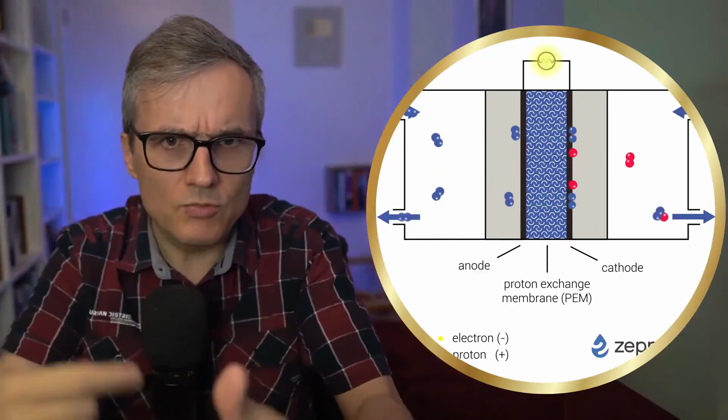The second step is the fuel cell, which is found in the car and converts the chemical energy of hydrogen back into electric energy in order to rotate the shaft of the electric motor. Two intermediate steps that cost money and in which additional energy is lost.

Look, let's say we have industrial electrolyzers, which convert the electric energy from wind turbines and photovoltaic solar panels into the chemical energy of green hydrogen, separated from water. Then, we compress the hydrogen and store it in tanks and transport it to fueling stations for cars, or we transport it there through a dedicated hydrogen pipeline network, an infrastructure that still doesn't exist. At the fueling stations, the hydrogen is loaded into the car's tank.

The energy density per kilogram of hydrogen is much higher than that of electric batteries. 33,000 Wh/kg of hydrogen compared to only a few hundred Wh/kg for lithium-ion batteries. The same thing happens with energy density per volume. With higher energy density, hydrogen has an advantage. We fill the tank with more energy and it goes farther than the electric car. Plus, we can refuel with hydrogen faster than we can charge an electric battery.

But if we remember the explosion of the airship Hindenburg, which had hydrogen in its balloon, maybe we're scared to carry compressed hydrogen tanks in the car. However, it seems that they are very safe as long as the regulations are followed. Researcher Michael Swain from the University of Miami says that they are actually even safer than the gasoline in a regular car, which is also flammable.

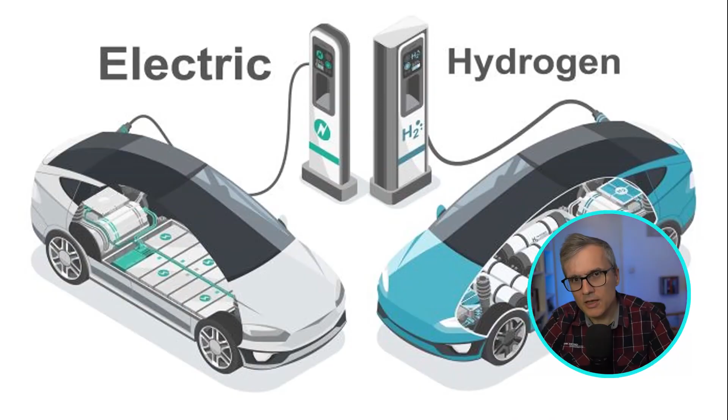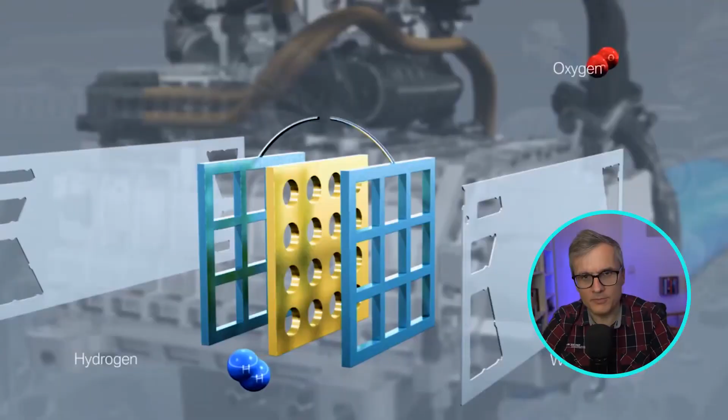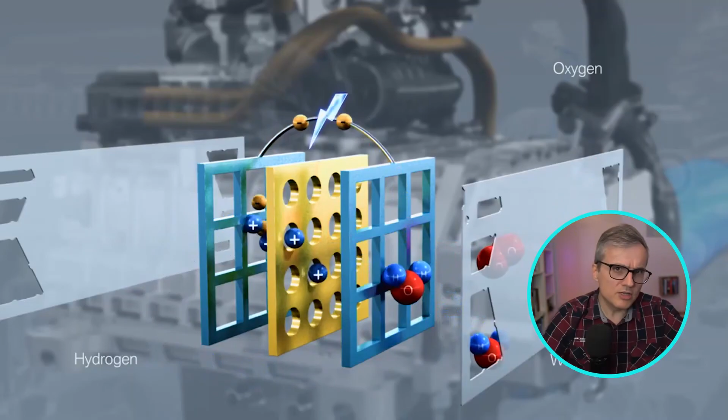In the hydrogen car engine, we need something else: fuel cells. These operate in the opposite way to electrolysis. The hydrogen from the tank is combined with oxygen from the air to form water. There's also water vapor coming out of the exhaust pipe, which is ideal for a clean environment. During the process, the chemical energy stored in the hydrogen is released, which was stored when it was extracted from water. The cycle is complete.

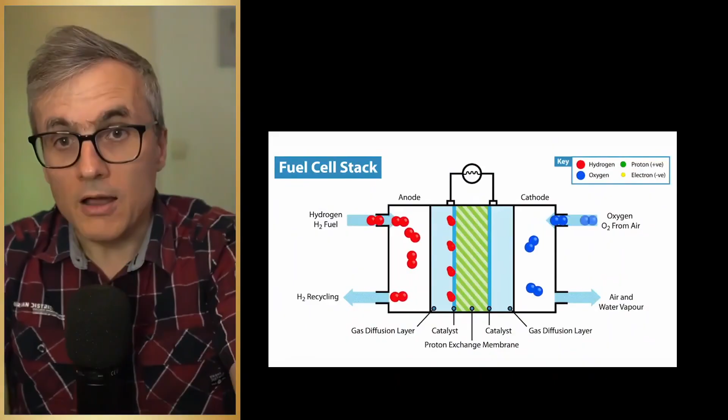When we extracted hydrogen from water through electrolysis, we used electrical energy from the outlet, let's say produced by wind turbines, to store it in hydrogen. Now we have recombined the hydrogen with oxygen, recovering the initial water and releasing the chemical energy of the hydrogen, which we converted into mechanical energy through fuel cells and the electric motor.

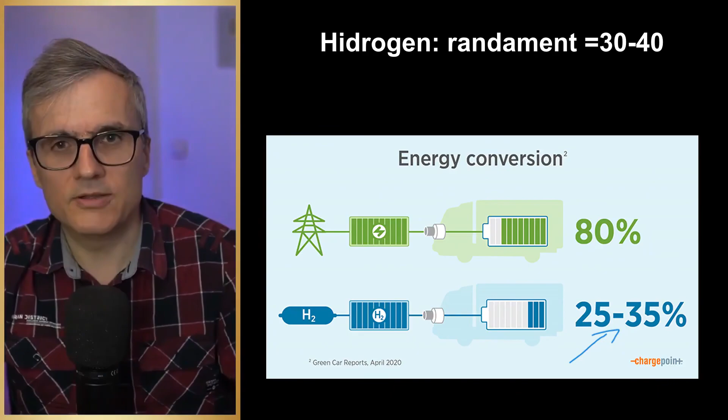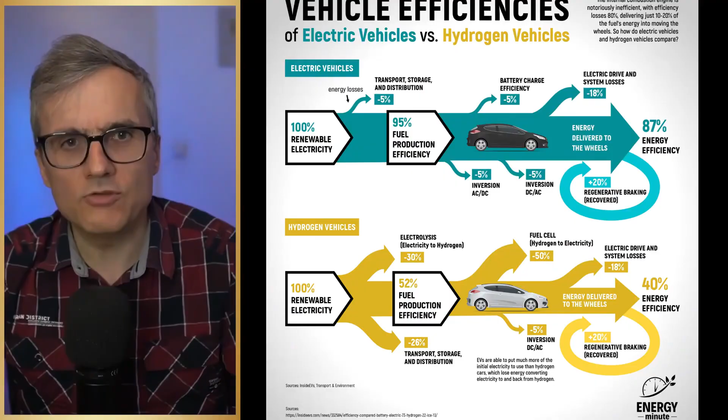The overall efficiency of the process is less than 40%, some even say 30%. Yes, you heard that right. That's compared to an electric car, which has an efficiency that even exceeds 80%. Extremely little when it comes to hydrogen. This is also reflected in the cost. Estimates show that the energy cost per kilometer for hydrogen cars is about 3 to 4 times higher than for battery electric cars, although I have found estimates that say it is more than 10 times higher.

That's why there are many voices saying that it doesn't make sense to bother with hydrogen to power cars. We lose too much energy along the way, almost 60 to 70%. And only 30 to 40% remains. The cost will automatically be higher than for an electric car.

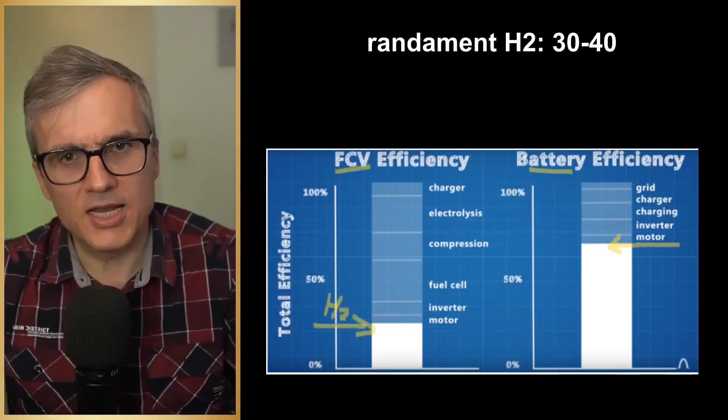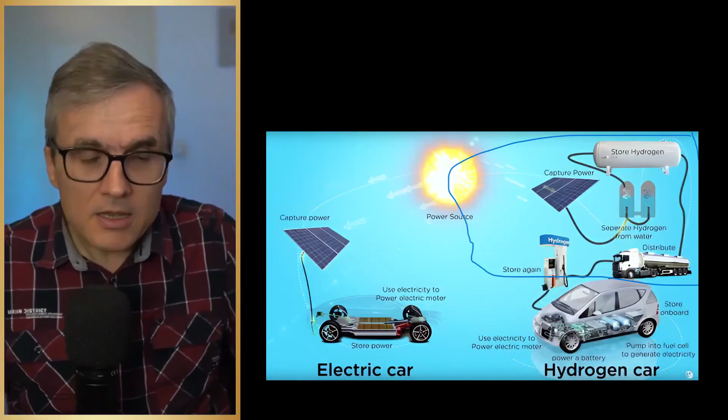Why is so much energy lost with hydrogen compared to the electric car? It's normal. With the electric car, the energy is stored directly in the battery without conversion like with hydrogen, where electrolysis is used. And it's used directly from the battery without another conversion like in the fuel cell. This approach removes the entire energy-losing chain seen with hydrogen from the beginning. This is the main reason why, in practice, we still don't have hydrogen cars.

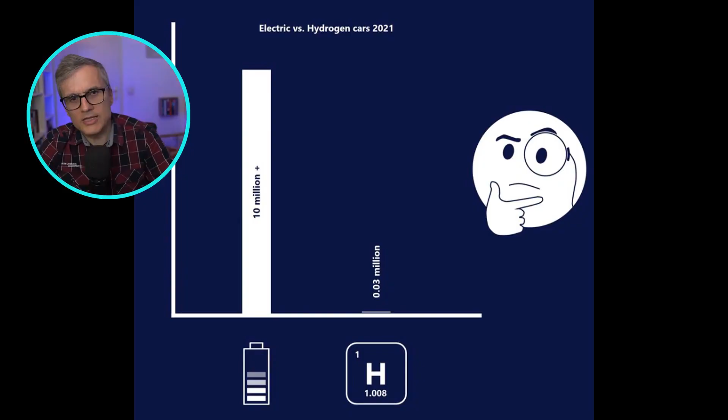Only a few models of such cars are produced in the world, like Toyota Mirai or Hyundai Nexo. And in Germany, the strongest European economy, only 263 new hydrogen cars were registered in 2023, down by 70 compared to the previous year.

Simply put, hydrogen technology is more complex. With additional elements like electrolyzers and fuel cells, the efficiency is still low and the hydrogen distribution system is almost completely lacking. Let's be honest, it seems like a dead end for cars.

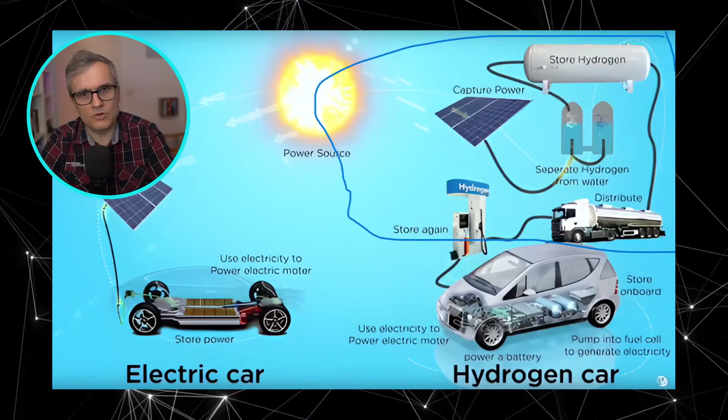The energy efficiency of hydrogen cars is much lower than that of electric cars. The efficiency is somewhere between 30 and 40%. So, is hydrogen completely useless for transportation? Not necessarily. Electric transportation has a problem today, the weight and volume of batteries.

We see this from the very small number of electric cars that can go over 400 kilometers without being recharged. Of course, you can go 800 kilometers on batteries if you carry twice as many batteries with you, but that means double the battery cost as well as double the weight and volume. For trucks, the numbers will be even higher.

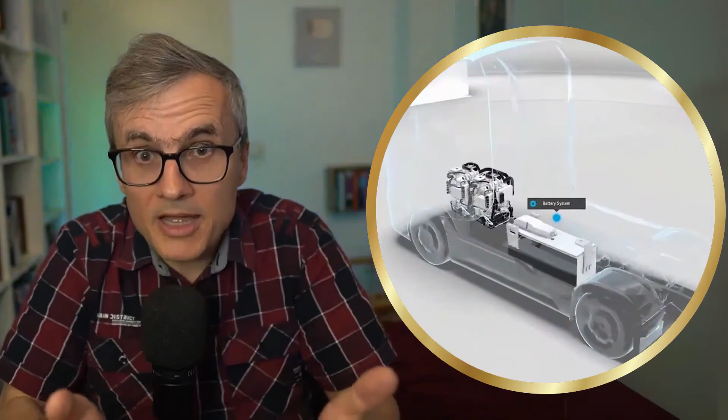If we talk only about trucks, there are some immediate advantages to hydrogen. The energy density of hydrogen is higher, both in terms of volume and mass. This means that a hydrogen truck will have a greater range than a battery-powered one with the same volume or mass. In addition, hydrogen can be refueled much faster than a battery can be charged, and that's important for trucks.

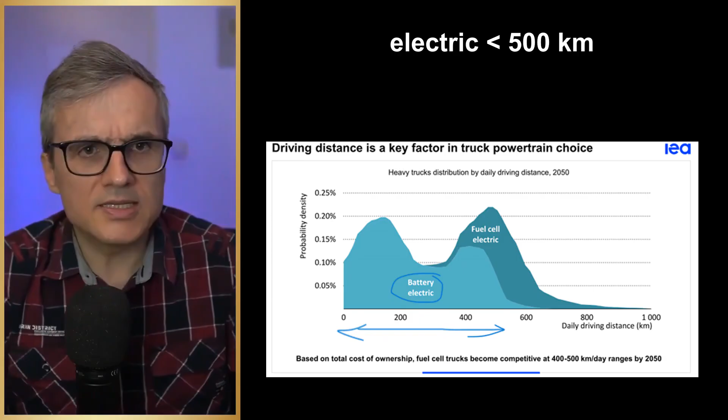That's what we see in this chart. It's a prediction of the types of trucks that could exist in the year 2050. As you can see, most of them would be electric when the distance is less than 500 kilometers. For longer distances, however, the trucks could run on hydrogen. Hydrogen is still less efficient than electric batteries. That's because someone somewhere will be willing to pay more to transport faster with hydrogen and over longer distances.

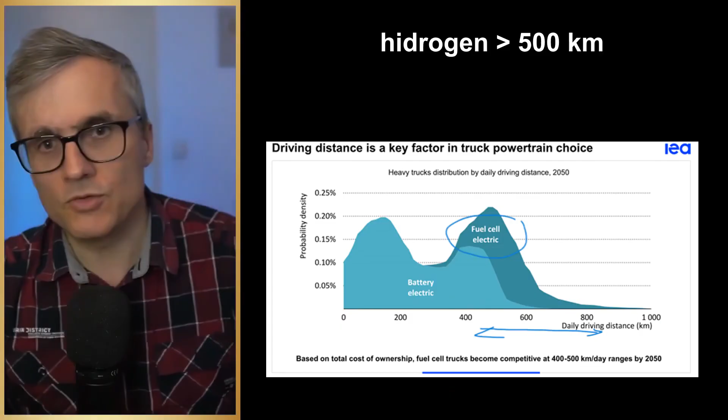It's possible this scenario won't occur by 2050. That's because electric batteries are developing rapidly now, and it's possible that in over 25 years the energy density in electric batteries will increase, thus cancelling out hydrogen's advantage. It's true, there have been a few hydrogen truck projects. However, none of them are economically feasible yet.

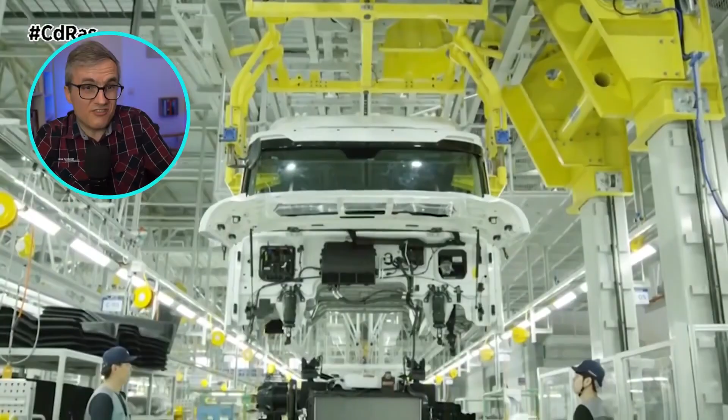Another type of project is the Hyundai Xcient Fuel Cell, a hydrogen truck launched by Hyundai. Although it promises extended range and zero emissions, the high production costs and limited infrastructure for hydrogen refueling make it difficult to adopt this type of vehicle on a large scale, at least for now.

Along the same lines, there is talk about hydrogen ships such as Energy Observer 2, which is expected to be put into use in 2025. Or about hydrogen-powered airplanes, with the first one expected to be built by Airbus in 2035. But are these processes economically feasible?

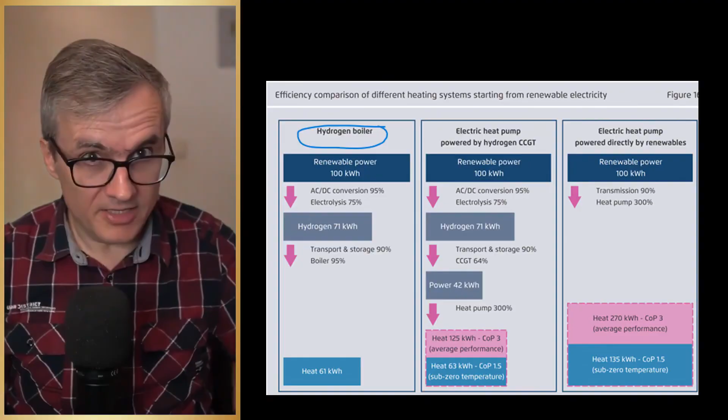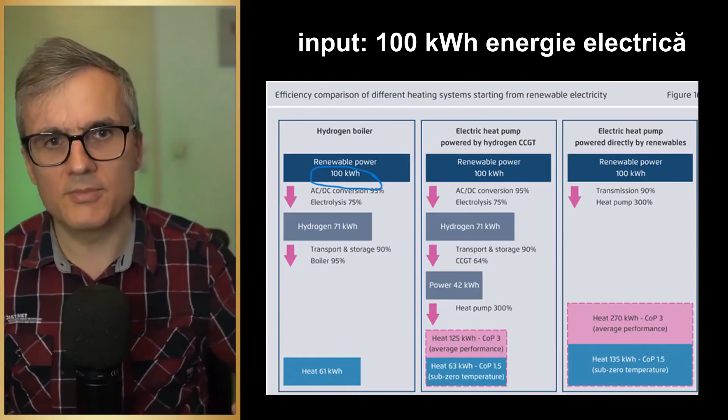The situation becomes even clearer if we compare green hydrogen heating with heating using heat pumps. Take a look at this study. On the left, there are 100 kWh of electricity obtained from renewable sources. We pass the energy through electrolysis, extract hydrogen, transport it through pipelines, and put it into a boiler, and then we're left with only 61 kWh of useful energy.

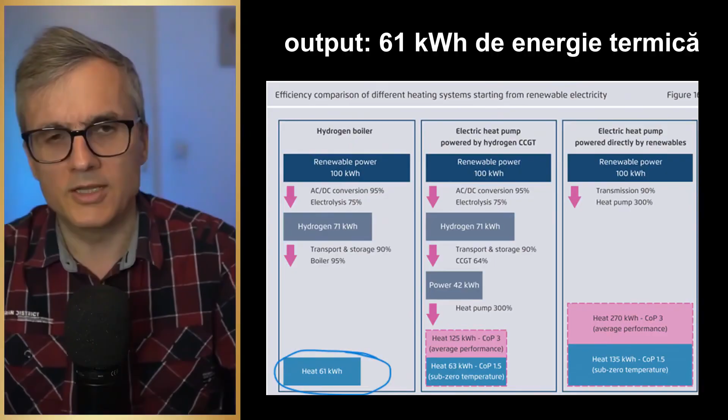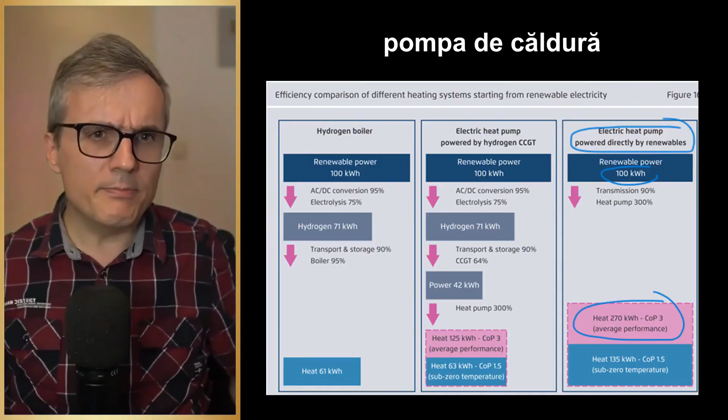On the right, we see how much we get from the heat pump if we put the same initial 100 kWh into it. 270 kWh, which is almost 4.5 times more than from hydrogen. If you're surprised that more energy is obtained, please watch my video about heat pumps. The heat pump is clearly much more advantageous.

For all hydrogen systems, transportation is a problem. For short distances, transporting hydrogen through natural gas pipelines would be the preferred option, but it's not that easy. Here's what the EPG report says. For distances less than 1,500 km, transporting hydrogen through natural gas pipelines is generally the least expensive option, although this requires either reusing existing infrastructure or new investments to connect production sources to demand points.

For longer distances, transporting hydrogen as ammonia or as a liquid hydrogen carrier could be a relatively cheaper option, but conversions come with significant efficiency losses.

If you didn't know, in Romania we have a draft national hydrogen strategy, which is currently going through the environmental approval stage before adoption. Essentially, it's a requirement from the European Union because part of the funding will also come from there. To give us an idea, the current situation looks like this.

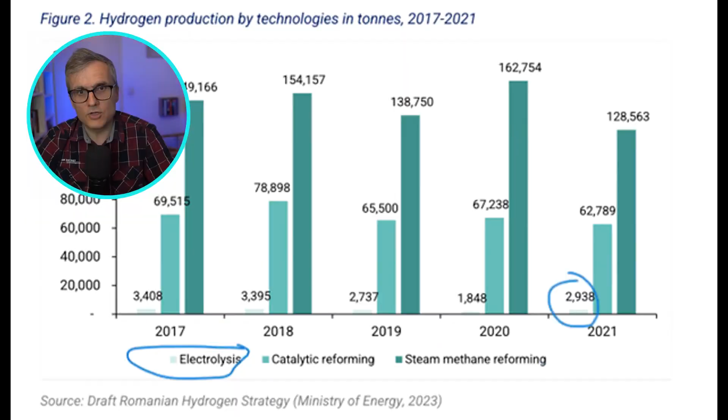At present, the grey hydrogen produced in Romania is over 200,000 tons, and the green hydrogen produced by electrolysis is only 3,000 tons. That means we need an almost 60-fold increase in green hydrogen to replace the industrial grey hydrogen. The draft National Hydrogen Strategy estimates an investment requirement of 4.8 billion euros to produce 150,000 tons of hydrogen per year from renewable sources by 2030.

Of that, 47% would be used in transportation, 37% in existing industrial activity, and 15% in new industrial applications, specifically in steelmaking. Simply put, by the year 2030, about a quarter of the grey hydrogen produced in Romania would be converted into green hydrogen.

If I divide the 4.8 billion euros by 6 years until 2030, I get 800 million euros per year. If I further divide that by the 150,000 tons of green hydrogen produced annually, I get a subsidy of almost 5 euros per kilogram of green hydrogen produced each year. Essentially, I can't help but notice that this is the current market price of green hydrogen.

Although the subsidy is not dedicated exclusively to industrial users of hydrogen, it is mainly intended to increase the production capacity of green hydrogen. Because in order to generate this green hydrogen, Romania needs electrolyzers and additional solar panels, and eventually wind power plants. In principle, the energy could also come from hydropower or nuclear plants. It is estimated that in order to meet the demand for green hydrogen, 4,000 megawatts of dedicated installed capacity from solar and wind energy are needed. These are very large numbers.

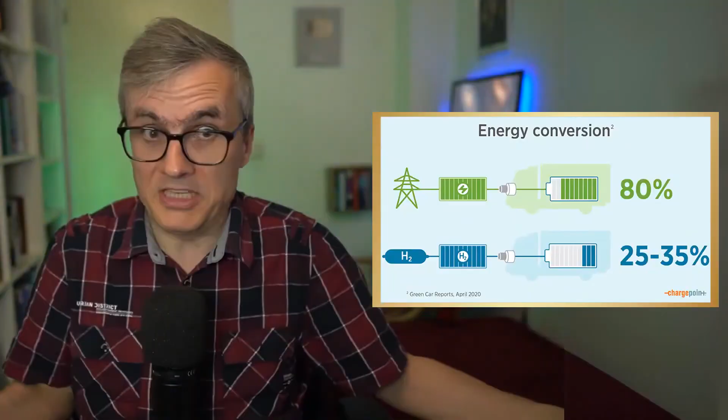I'll be honest with you, when I started my research for this series, I was skeptical about green hydrogen. I knew about the low energy efficiency of hydrogen cars, which is only about 25 to 35% throughout the chain, compared with efficiencies above 80%. And I also knew that hydrogen is not an energy source. It transfers energy from one place to another.

Simply put, hydrogen does not replace fossil fuels. It's still photovoltaic panels, wind power plants, and hydroelectric plants that will do that. Hydrogen only transports energy from one place to another and from one moment in time to another. In other words, I knew that hydrogen is not a miracle solution to the problem of global warming. That was confirmed by what I read.

As I anticipated, using hydrogen in road transport remains economically inefficient. If we replace gasoline and diesel cars, they will most likely become electric cars, not hydrogen-powered ones. On the other hand, I have discovered the importance of hydrogen in industrial processes. Because reforming methane to produce grey hydrogen makes a non-negligible contribution to global warming.

2%. In other words, if the European Union is serious about its goal of achieving climate neutrality by 2050, it must replace this grey hydrogen with green hydrogen with much lower carbon emissions. We then need electrolyzers, photovoltaic panels, and everything else. However, this is a decision society as a whole must make. I'll stop here with the technical aspects of the problem that I tried to clarify for you.